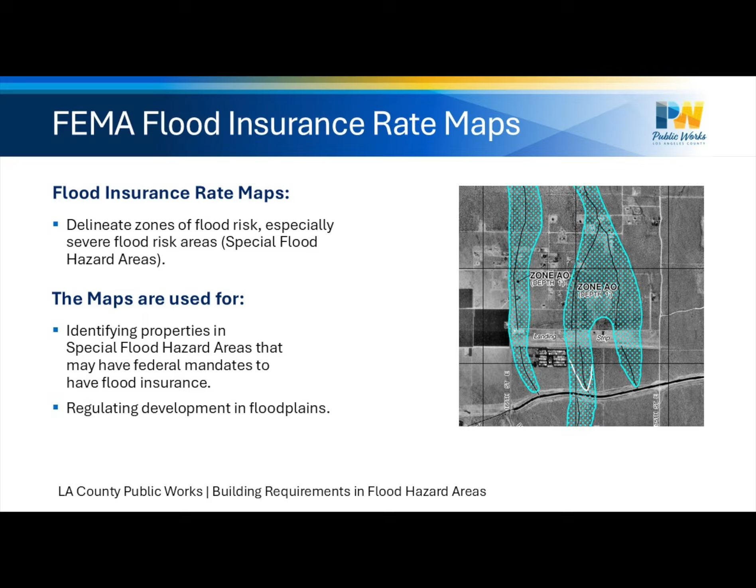Defining flood risk is a vital task under the National Flood Insurance Program, so FEMA developed flood insurance rate maps. We'll talk about special flood hazard areas in the next couple of slides. A special flood hazard area is the inundation area of the 1 in 100, or 1%, annual chance flood. The term has been verbally shortened to the 100-year flood. FEMA also calls this the base flood. The water level associated with this flood is the base flood elevation. Enforcement of National Flood Insurance Program regulations is required for the county's participation in the NFIP. This makes federally backed flood insurance available to you.

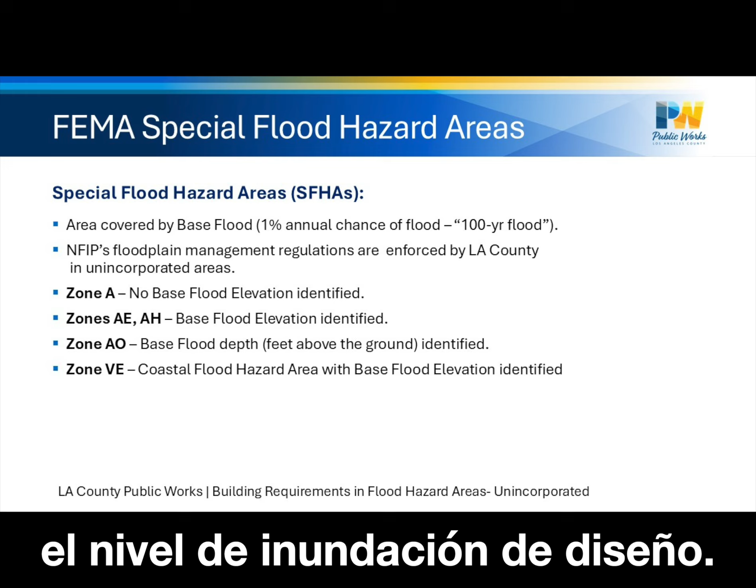For unincorporated Los Angeles County, the special flood hazard areas are mapped as A zones for creeks and streams, or V zones for coastal lands. Zone A, the flood risk is less defined. It's more difficult to identify the design flood level. Zones AE, AH, and AO, the risk is better defined. They have base flood elevations or depths. It's easier to identify the design flood level. Zone VE, the risk is also better defined. For our unincorporated coastal area here, the properties in this zone are government-owned, state and county.

Now, you may think a 1% annual chance isn't much of a risk, but over the years, the odds of flooding add up. Over the life of a 30-year mortgage, the odds of the base flood occurring is over 1 in 4, or 26%. Over a 100-year period, the chances of the base flood occurring is about 63%.

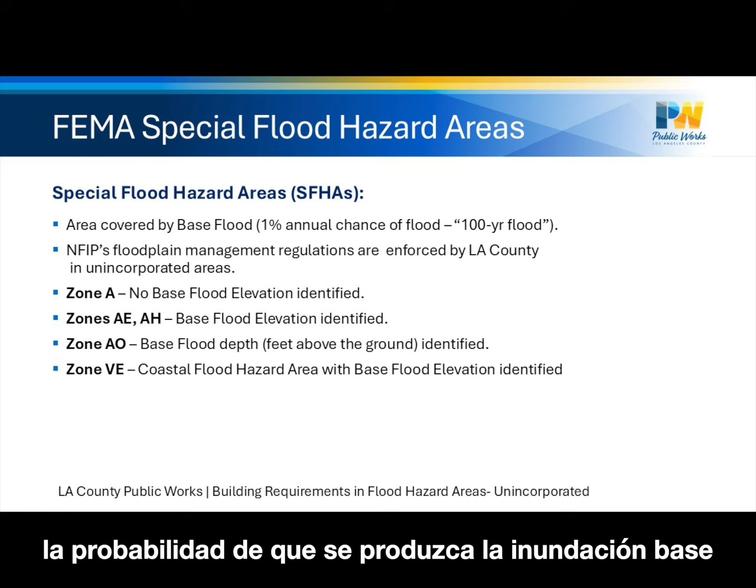The county also regulates development in floodplains using county floodway maps adopted by the Board of Supervisors. Sometimes the county will use floodway maps that the Board of Supervisors has not adopted if they provide the best available flood hazard information. County floodway maps are not used to identify a government mandate for flood insurance.

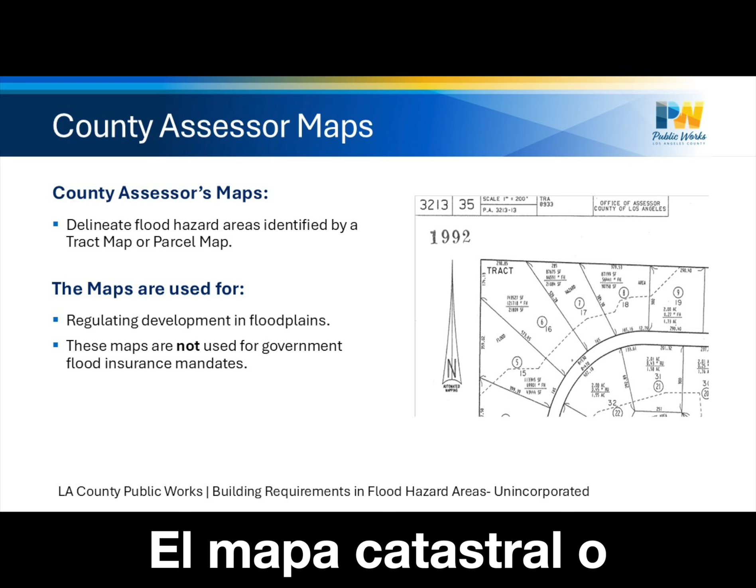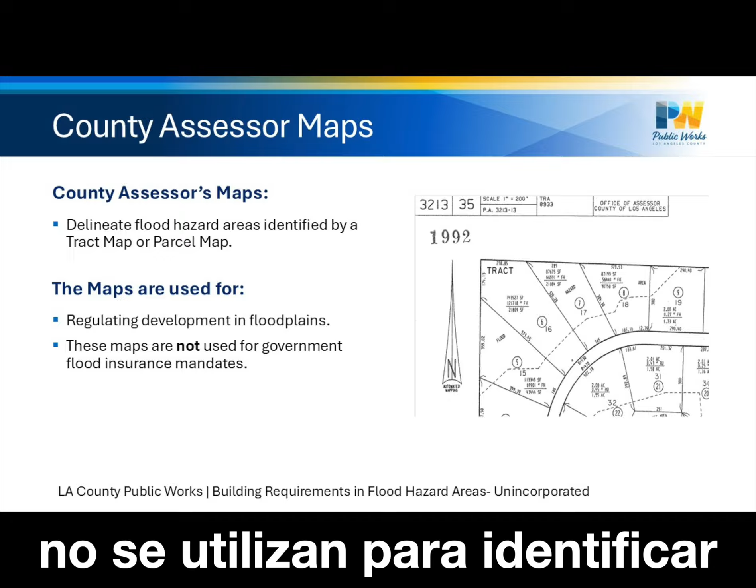The county assessor's maps may also show flood hazard areas identified by a tract map or parcel map. The assessor's map will show a map book and pages for the tract or parcel. The actual tract map or parcel map is a scale drawing, so the limits of the flood hazard area can be measured. The county also regulates development in these mapped flood hazard areas. The assessor's maps are not used to identify a government mandate for flood insurance.

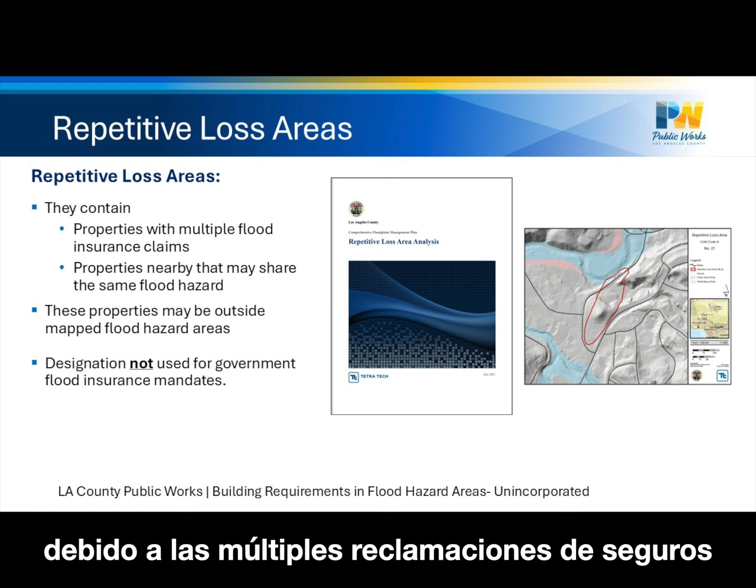There are properties that are deemed by FEMA to be repetitive loss properties due to multiple flood insurance claims over the years. There may be properties close by that may be exposed to the same flood hazard. The area encompassing all these properties is called a repetitive loss area. These properties may not necessarily be mapped by FEMA maps, or county floodway maps, or county assessor's maps.

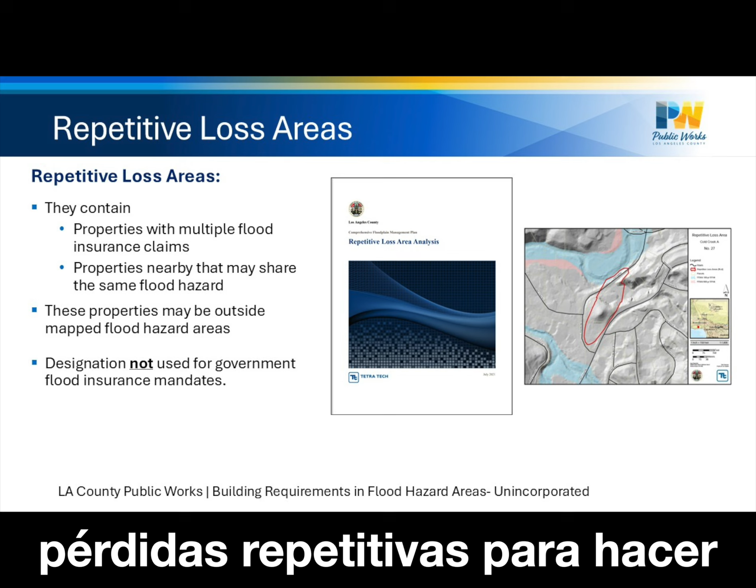The county has prepared a repetitive loss area analysis for the unincorporated areas, which is available at Public Works' National Flood Insurance Program website. Due to the Federal Privacy Act, the county's repetitive loss area analysis does not identify property addresses. However, the county annually mails specific information to the owners of the properties in the repetitive loss areas, so they should be already aware of the potential presence of flood hazards on their property. The county regulates development on repetitive loss area properties to address the potential flood hazard. The repetitive loss area delineations are not used to identify a government mandate for flood insurance.

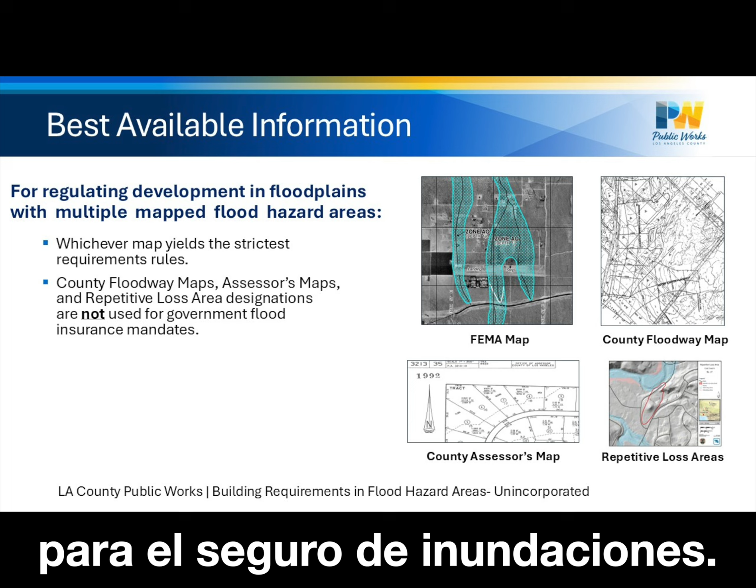Any property may have multiple flood hazard areas. So, the map or designation that yields the strictest development requirements is considered the best available information for flood hazards, and thus rules for building projects. Again, the county floodway maps, assessors maps, and repetitive loss area designations are not used to identify a government mandate for flood insurance. Only the FEMA maps are.

You can reach Public Works' flood zone determination website through the Water for LA County website's flood preparation webpage. Public Works' flood zone determination website can identify the FEMA flood zones and any county-mapped flood hazard areas on every property in Los Angeles County. Just click on your property or enter your property's address.

The flood zone website has links to the actual FEMA flood insurance rate maps, county floodway maps, and county assessors maps, and links to elevation certificates associated with finished permitted construction in unincorporated areas. These only go back to the mid-1990s, and elevation certificates done by homeowners themselves for insurance purposes are not included. The Flood Zone app is also mobile-friendly.

You can get Public Works' repetitive loss area analysis through the 2020 Floodplain Management Plan webpage on Public Works' NFIP and County Floodways website. The repetitive loss area analysis identifies the repetitive loss areas in unincorporated Los Angeles County. When in doubt about whether your property is in a repetitive loss area, contact Public Works through the flood analysis email or NFIP hotline. The contact information is at the end of this presentation.

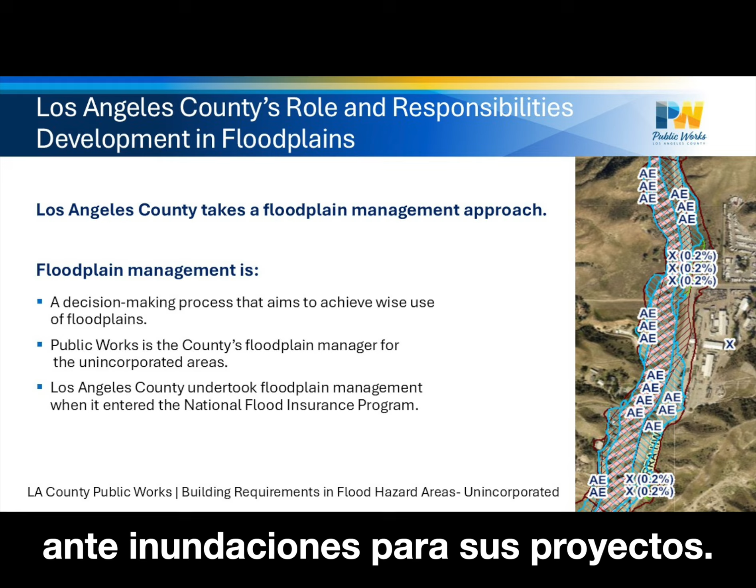Developers and Public Works have flood resiliency requirements for their projects. Public Works is the floodplain manager for the county's unincorporated areas. Los Angeles County is one of the only highly rated community rating system communities in California that still allows new construction in FEMA 100-year floodplains. However, strict flood resiliency requirements must be met. And there's a push to require NFIP participating communities to prohibit new construction in 100-year floodplains. 85 other cities in the county participate in the NFIP and do their own floodplain management.

Floodplain management roles and responsibilities are spread over numerous areas in Public Works. Building and Safety and Land Development divisions ensure single-lot and large-scale developments do not increase flood hazards and do meet flood resiliency standards. Project Development divisions and Design division ensure Public Works' project designs do not increase flood hazards.

The county's floodplain manager interprets county floodway code and FEMA requirements for development services divisions and project managers, and coordinates with FEMA on flood insurance rate map revisions and matters relating to compliance with the National Flood Insurance Program, including audits of the county's compliance with the program's requirements. Department of Regional Planning is also involved with its updates of requirements of the county's general plan, the safety element, and community standards districts, and its issuance of conditional use permits.

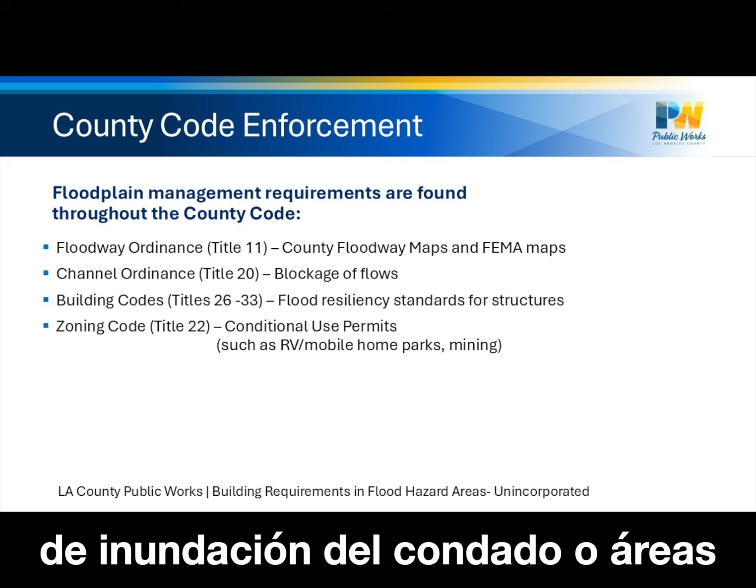Flood resiliency requirements have been inserted into several places in the county code. County floodway maps, FEMA flood insurance rate maps, and sometimes county assessor maps identify high flood hazard areas. Not all unincorporated areas have county floodway maps or assessor mapped flood hazard areas. The county's channel ordinance covers flood safety in unmapped areas and where the building codes don't apply, such as walls or fences crossing flow paths, large objects placed in flow paths, such as containers, and revegetation projects and watercourses.

Although the state of California oversees mobile home park operations, the county's Department of Regional Planning still oversees the establishment of new ones. The county's Department of Regional Planning coordinates with Public Works' Land Development Division on mining projects.

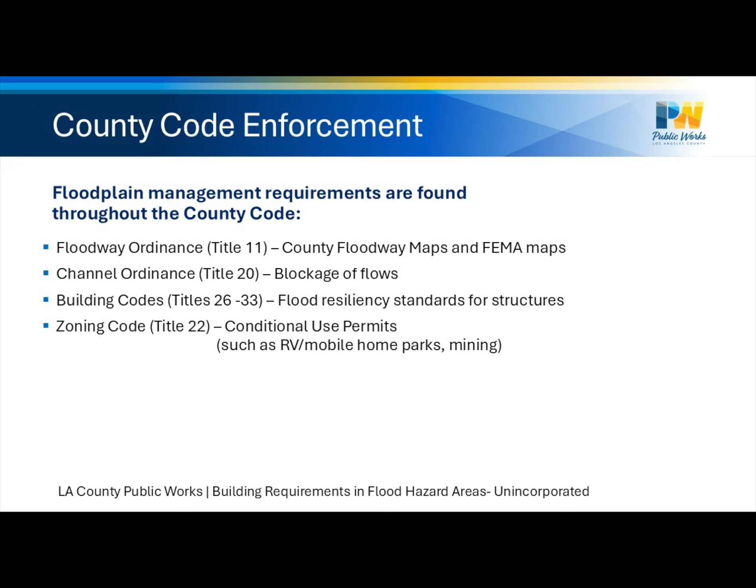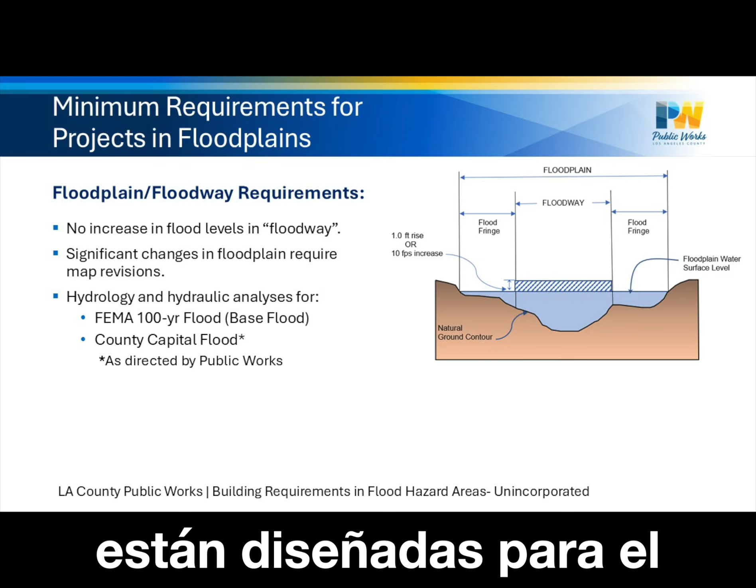Many 100-year flood areas are mapped as an approximate zone A, so there's no base flood elevations defined. This makes compliance difficult for developers, especially single-lot developers. Projects may additionally be required to consider the county capital flood. Where the county has higher standards, the National Flood Insurance Program, or NFIP, requires the higher standard be used. So the NFIP requires compliance with county capital flood standards. Please note, when drainage facilities are designed for capital flood flow, the flow cannot be used for the FEMA CLOMRs and LOMRs. The FEMA flows must be used.

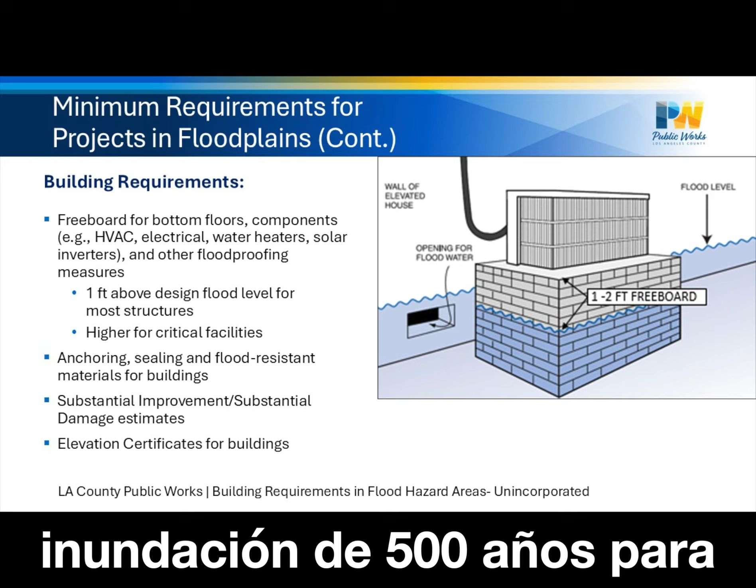Structures. The lowest floors and components must be elevated 1 foot above the base flood elevation for most structures, 2 feet above the base flood elevation or at the 500-year flood elevation for critical structures, such as police or fire stations, schools, or hospitals. Substantial improvement, substantial damage. We'll get to why this factor needs to be considered.

Elevation certificates are required for finished construction. They document floor and component elevations, which is important for flood insurance. For the county, they document compliance with flood resiliency standards. This is important for FEMA audits. When structures or drainage facilities are designed for the county capital flood, FEMA flood elevations must still be used for the elevation certificates.

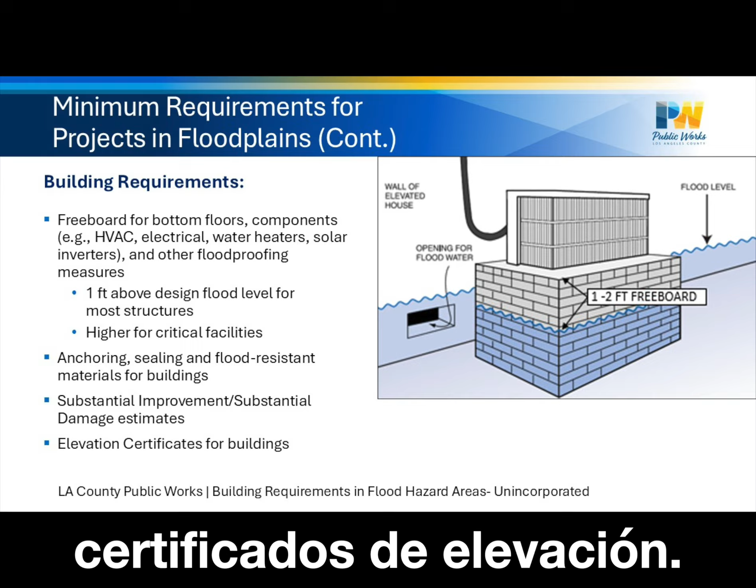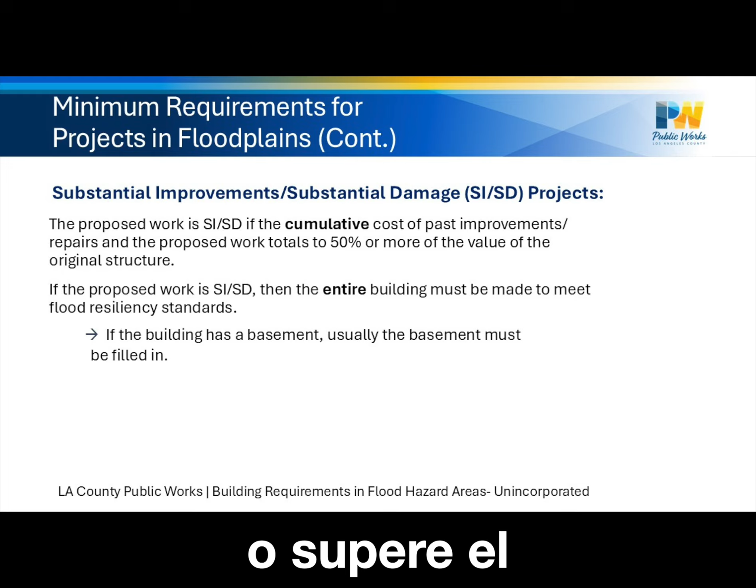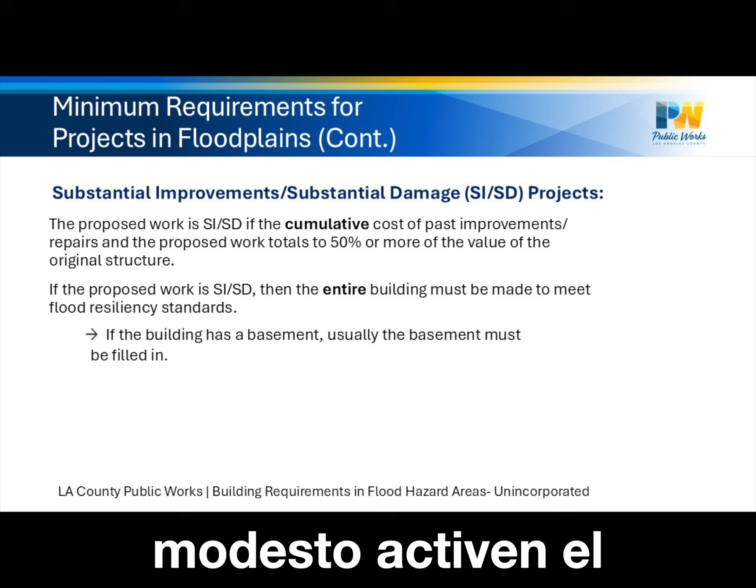Substantial improvement, substantial damage, or SISD. When the cumulative cost of projects on the building reach or exceed 50% of the pre-work or pre-damaged structure, the entire structure must be made compliant. It doesn't take much for improvements or repairs on modest value structures to trigger the SISD upgrade requirement. Past building permits for the structure will be reviewed to determine the cumulative value of past improvements over the years.

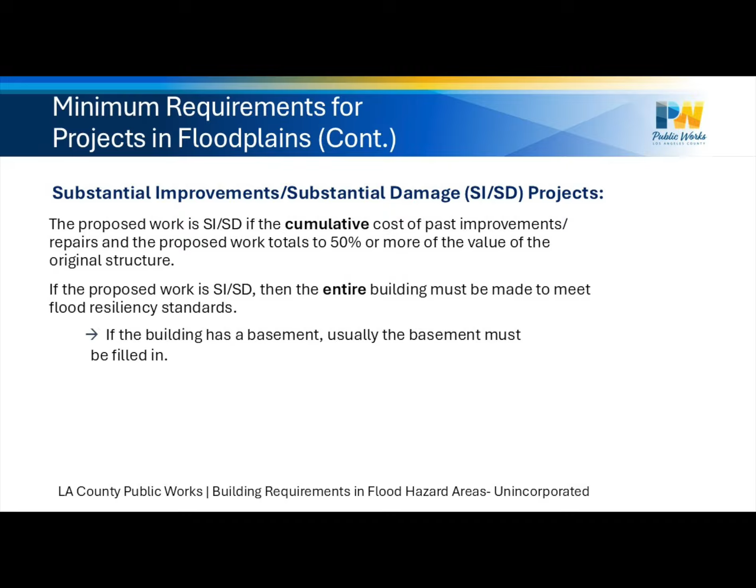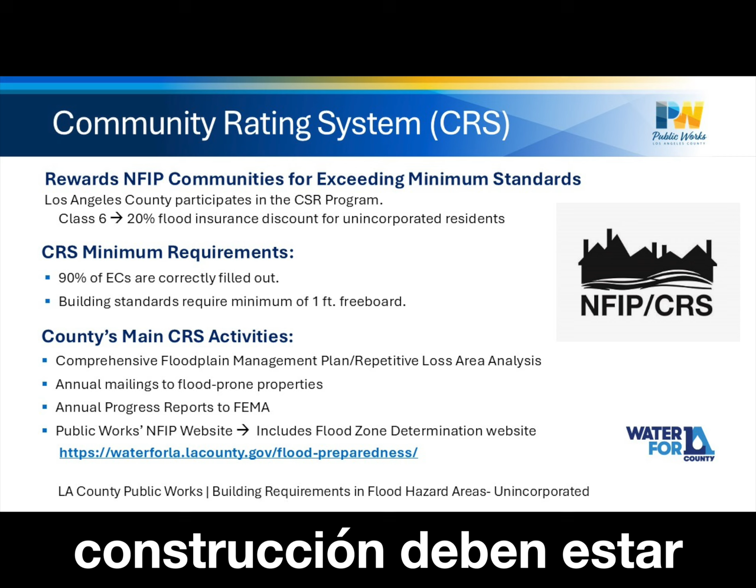We want to tell you about the National Flood Insurance Program's Community Rating System, or CRS. Los Angeles County entered the CRS to get flood insurance discounts for unincorporated area residents. CRS participants adopt higher building standards than the National Flood Insurance Program's minimum requirements. The lowest floors and building components must be at least 1 foot higher than the FEMA base flood elevation. Los Angeles County appears to be the only community of Class 6 or better in California to allow new construction in 100-year floodplains. There is a push to require all communities participating in the National Flood Insurance Program to prohibit new construction in 100-year floodplains.

CRS activities get audited every 5 years. Los Angeles County's CRS class is based on the audit results. FEMA now requires annual audits of the elevation certificates. The annual number of certificates issued in the unincorporated areas is so low, a single incorrect certificate is troublesome for Los Angeles County. The county undertakes a lot of outreach activities to reach CRS credits. The floodplain management plan and repetitive loss area analysis must get updated every 5 years. The 2020 update was adopted by the Board of Supervisors in June 2021.

These documents contain measures which include annual informational mailings to flood-prone owners and residents, and to lenders, realtors, and insurance companies. And it's challenging to reach rural renters whose mail is delivered to post office boxes instead of the properties. It also includes annual progress reports to FEMA. Go to the Water for LA County website's flood preparedness webpage to get the flood zone determination website. The flood zone app is also mobile friendly.

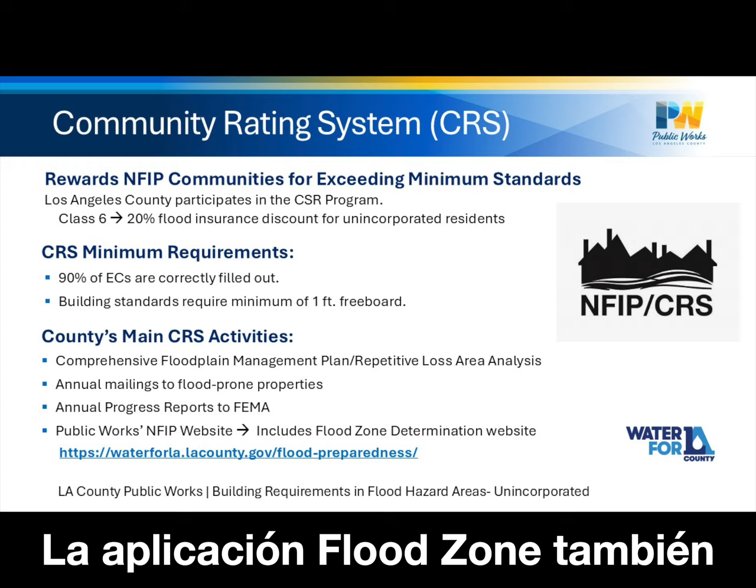The consequences of noncompliance are significant. The county itself isn't punished. Its unincorporated residents are.